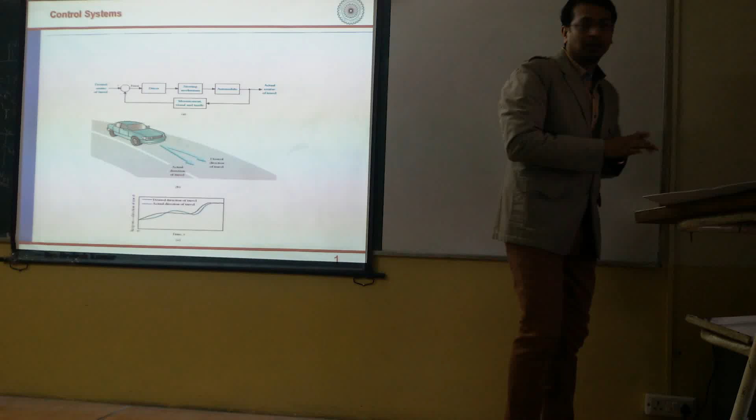Let us start our subject of control system with some basic definitions. The first definition is the definition of the system itself. System is nothing but domain of interest. Suppose you are interested in this classroom; it will become a system for you, and what is happening outside the classroom, you are not going to pay any heed to it.

Similarly, you may be interested in a particular component or a particular part of an industry. Then that particular part will become the system for you, and the other part of the industry in which you are not interested will become out of system for you. You may be interested in the whole industry, which means there is no particular size for a system. It depends upon your interest and your focus.

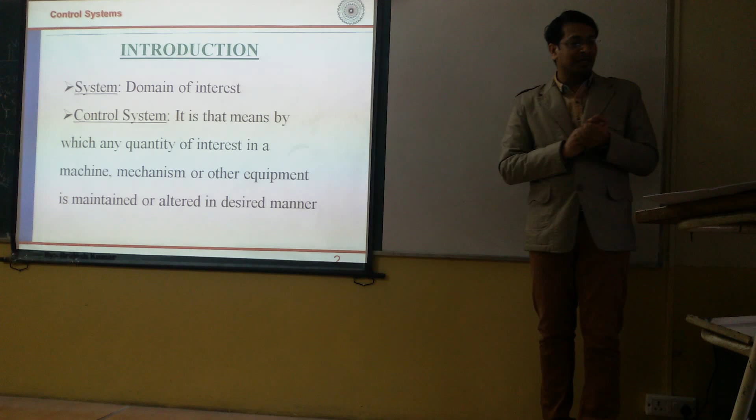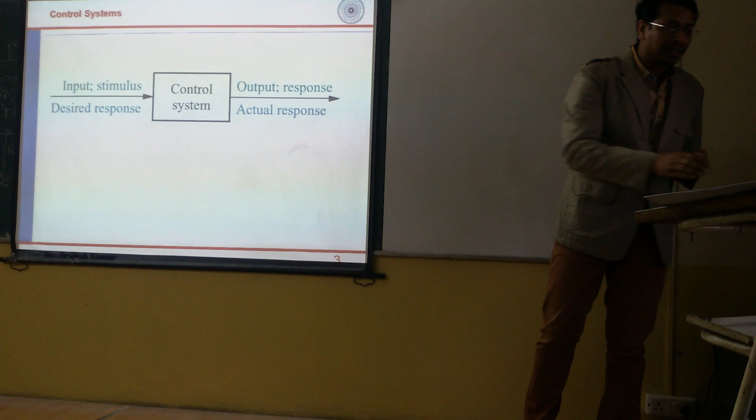Similarly, coming to the control system, the definition of the control system is that means by which any quantity of interest in a machine, mechanism or other equipment is maintained or altered in a desired manner. What I mean to say is that if you consider a control system as a black box, then at one end of the black box there will be input or a stimulus or desired response or set point, meaning what you want from the system.

It will be the input to the system, and the output will be just output, or response, or response variable, or the actual response. So set point and actual response. The difference between set point and actual response, you know, that is the error.

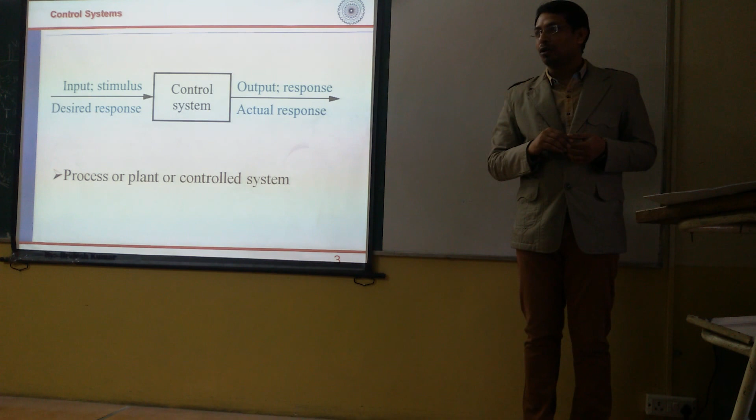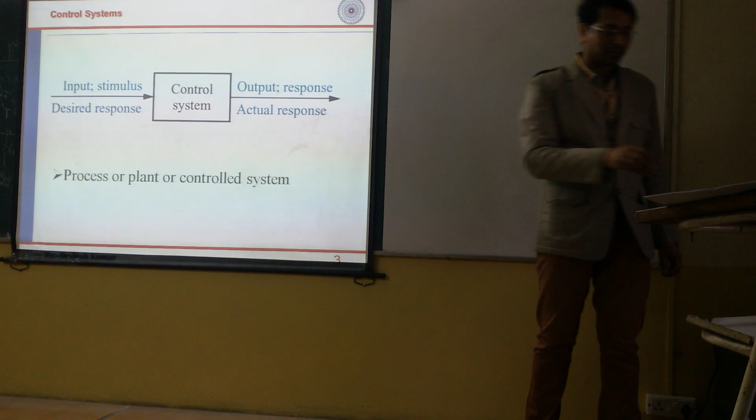The system to be controlled is given different names like process, plant or controlled system. You can say anything, depending upon the application. When you read process control, you will use the word process, and in this particular subject you will use controlled system. You can say plant also.

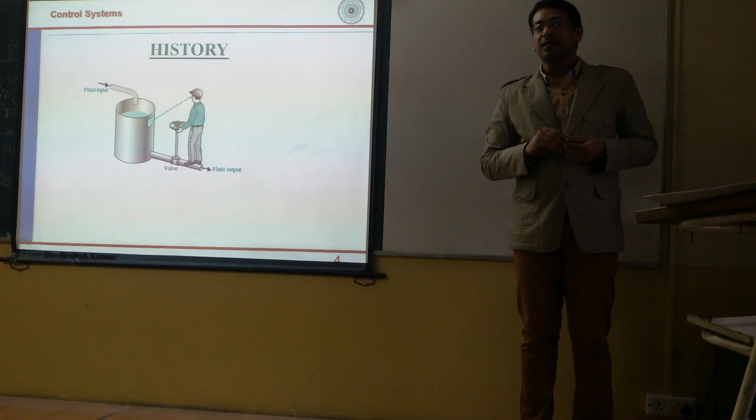So now coming to the history of the control system: the application of control technology, historically speaking, started in the era of process control, typically from 1900 to 1940. You can see a picture in which manual control is used. An operator is trying to maintain the position of the valve by seeing the level inside the tank. Here the eyes of the operator act as feedback, meaning he sees the level of the tank and accordingly closes or opens the valve.

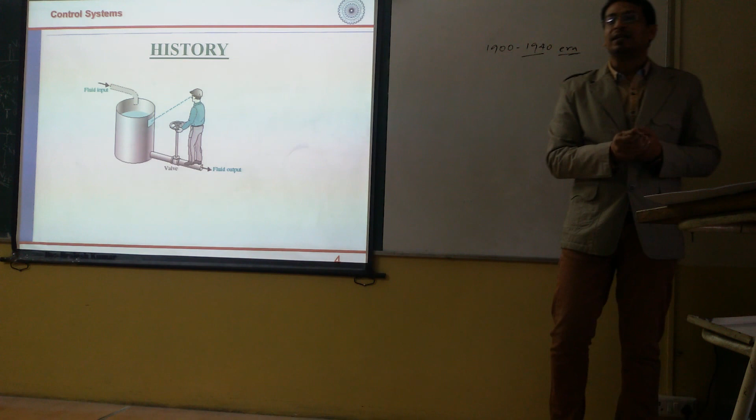And his brain acts as a controller, and the actuator, that is the final control element in a control system, is his hand. He is using his hand to open or close the valve. His final action is taken by his hand; that's why it is known as the actuator. So note it down that actuators are the final control element in a control system.

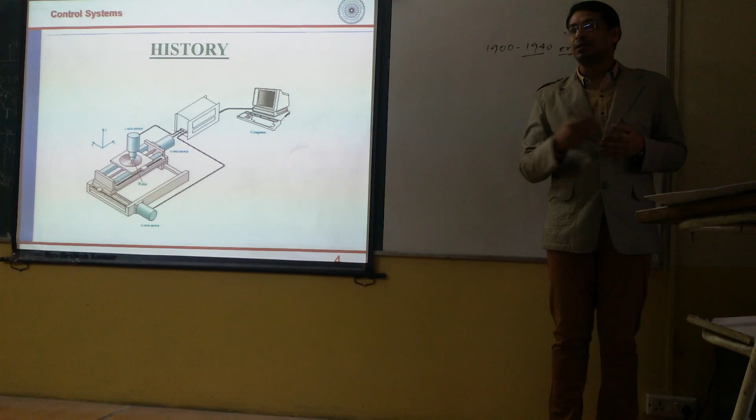From that era of process control, nowadays our industries look more like this. We have traveled a lot and moved from manual control systems towards automated control systems. How did it happen? After the era of process control, during the Second World War, the need for automatic gun positioning, automatic aircraft pilot, and automatic radar antenna control developed. To solve this problem, the theory of servo mechanism was developed during the Second World War.

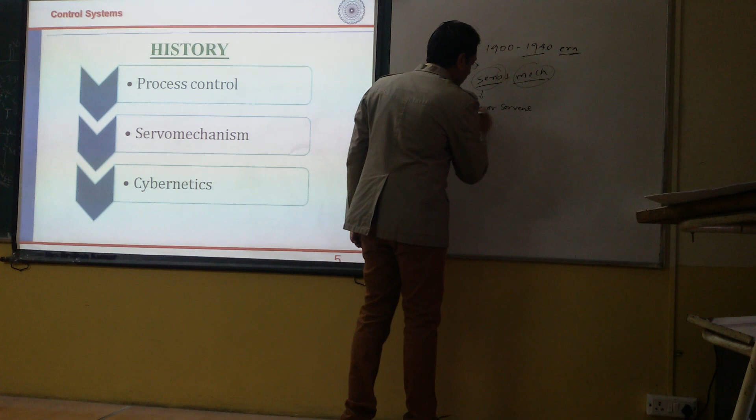If you break down the word servo mechanism etymologically, it consists of two words, servo plus mechanism. The word servo means slave or servant. It means servo systems are those systems which are slave or servant to their command: if you give a command, they will try to follow it. That's why in laboratory experiments we have seen servo potentiometers and servo motors. That's the meaning of servo, slave or servant.

After the servo mechanism, the theory of control system also started to be applied in socio-economic and biological applications. These applications come under cybernetics.

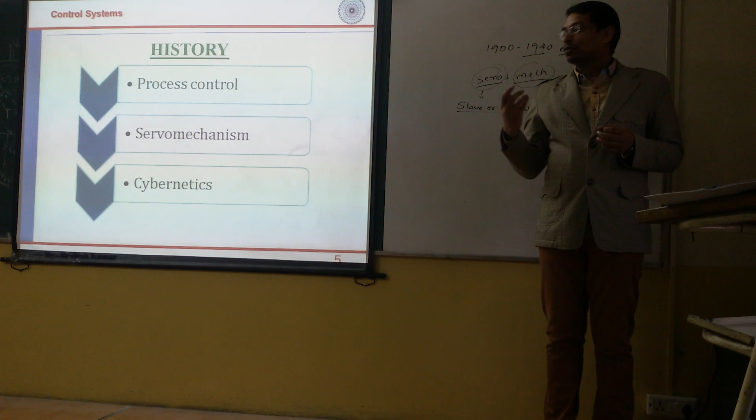So with the passage of time, the theory of process control, the theory of servo mechanism, and the theory of cybernetics started to merge, and a unified feedback control theory was developed. Whatever you are going to read in this course is nothing but unified feedback control theory, and this unified feedback control theory will be applicable to all the sub-branches of the control system.

Whether it may be process control or servo mechanism or cybernetics. So in this particular course you will read unified control theory, and accordingly you may specifically read process control in your third year, and you will see some part of servo mechanism here also, and cybernetics we are not going to pay any heed to. Okay.

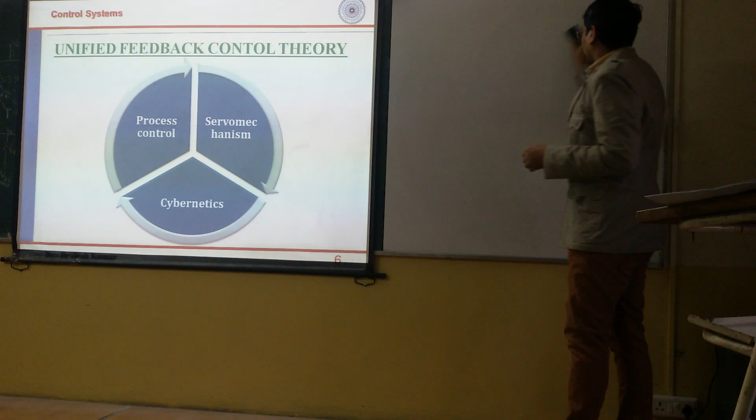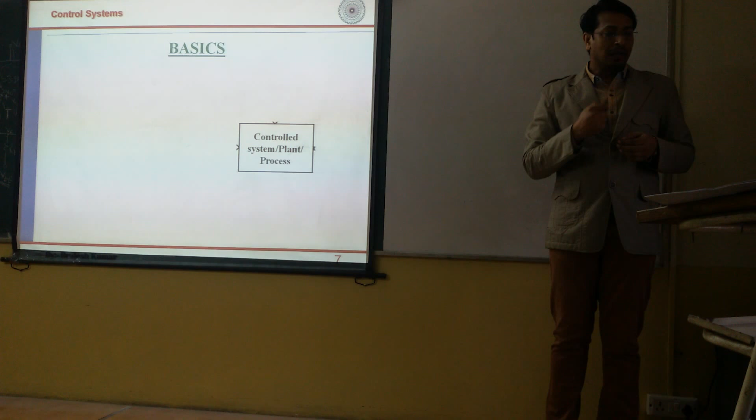Now, in the beginning of the discussion, we will start with a block. I have just said that you can call it a controlled system or plant or process. So this is a controlled system, or you can say plant, or you can say process. The output of this block is your response variable RV or control variable. These are the attributes of the plant or process which you want to control.

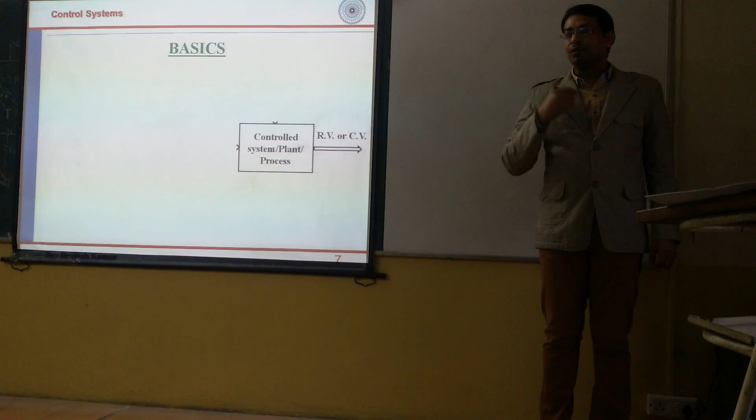Suppose you take this particular classroom as a process or plant; you may be interested in one of the attributes, say temperature. Then temperature will be the response variable or the control variable which you want to control. And this control will be exercised with the help of the manipulated variable.

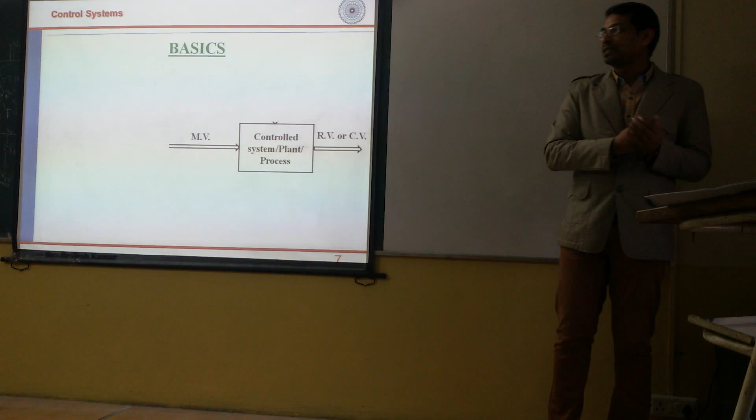This control has to be exercised in the presence of disturbance also, because you cannot avoid the presence of disturbance. These are unavoidable and undesirable inputs to the plant. The disturbance may originate from outside the system, from the outer environment, or from the system itself. Though it has been depicted in the picture as coming from outside, please note that the disturbance may

come from inside also. For example, if you have designed your plant for a particular operation and there are certain components in it, due to passage of time some values of components may change and act as a disturbance. This is one example. There are also cases in which different disturbances come from inside.

This manipulated variable is going to react to the plant or process, and this reaction will force your response variable to follow your command. So this manipulated variable will be guided by a controller which you as a control engineer are going to design. So what will be your job? Your job as a control engineer is to analyze and design this controller.

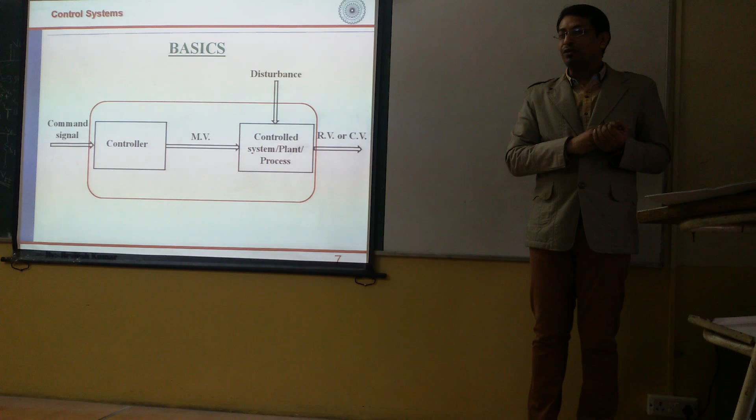And the user, those who will use the finished product, will just give a command signal. So for our course, our system is this: controller plus controlled system. So we as control engineers will read the theories of controllers, the various types of controllers, the various methods to analyze them, and the various methods to design them. And the user will just give the command signal.

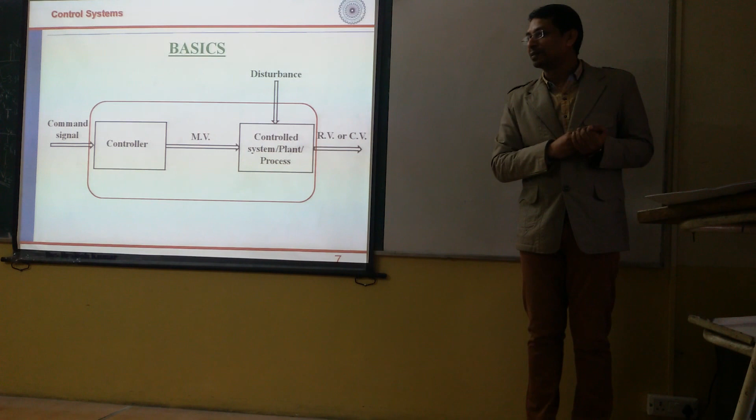Disturbance will come from the environment or from within the system itself, and he or she will desire the control output to be almost equal to the command signal. If there is a large difference between your control variable and the command signal or set point, your product will be out of the market. Okay.

So there are various techniques to achieve this particular control. One of these is that you have a controller and a command signal, and the user gives the command signal to the controller, and the controller manipulates this command signal. The controller analyzes your command signal. Maybe you just press a button, but the controller, after analyzing it, will generate a signal. That signal is known as the manipulated variable.

Then the manipulated variable will react with the controlled system and generate a response variable in spite of the presence of disturbance. So this is a system, one of the schemes with which you can achieve that control variable. But the problem with that scheme is this: suppose you have designed an intelligent controller, keeping the demand in mind.

For example, this classroom is your process or plant. So you know what the temperature variation of this classroom may be, say from 3 degrees up to 44 degrees.

So you are intelligent enough to analyze the need of the, you can say, plant. And you also know what may be the possible disturbances. Say somebody may open the window or somebody may open the door. So you are intelligent enough to know what may occur. But you can't predict exactly the nature of disturbance. But up to some extent, you have an idea of what may occur.

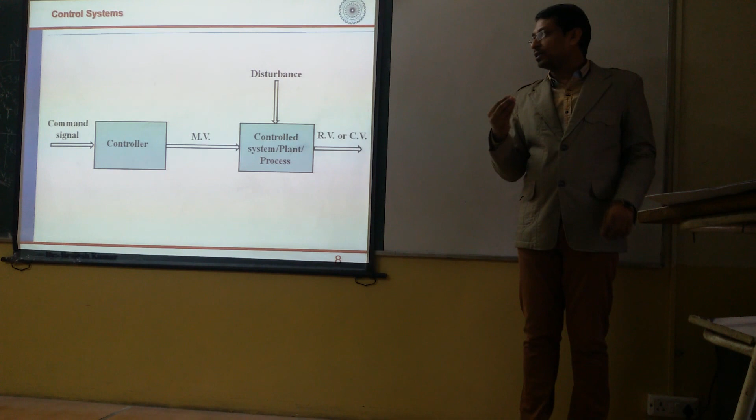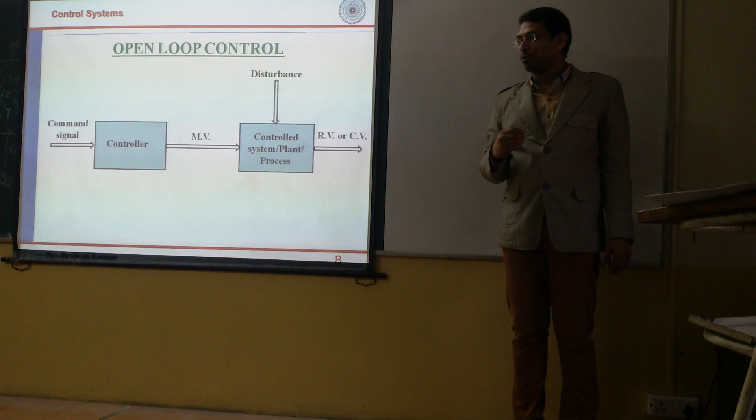Such terminology is also used, but we will focus in our course mainly on feedback control, because it is good to have feedback so that we can handle the change in disturbance also. So this type of system, which is also used for simple systems, is known as an open loop control system. So a question may be asked: what are open loop control systems, or give the differences between open loop and closed loop control systems.

So what may be the advantages of this? It is simple. You have seen that there is no feedback, so just simple connections are there. So this is one of the advantages. It is simple. Second one, it is stable. How it is stable and how the feedback control system may become unstable, we will see in the later section. Of course, there are fewer components, so it is economical also, and it is easy to construct. Because there is no feedback, you need not have a sensor.

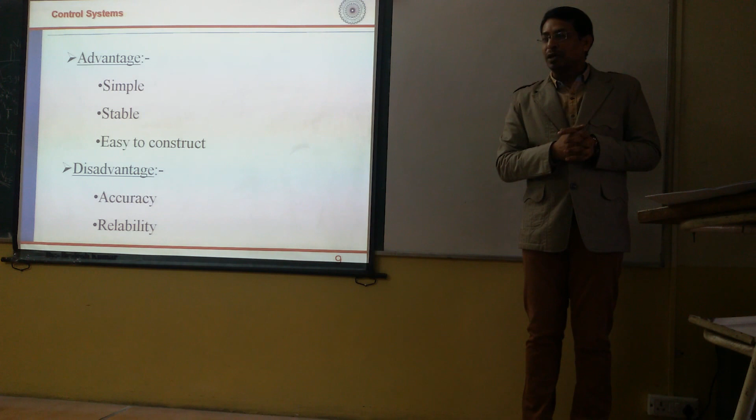What can be the disadvantage? The disadvantage is accuracy itself. Why? Because you do not have any feedback, so you will not be able to know what the error is. Because error is the difference between the response variable and your set point. So you will not be able to; you will just analyze. Okay. Second one is reliability.

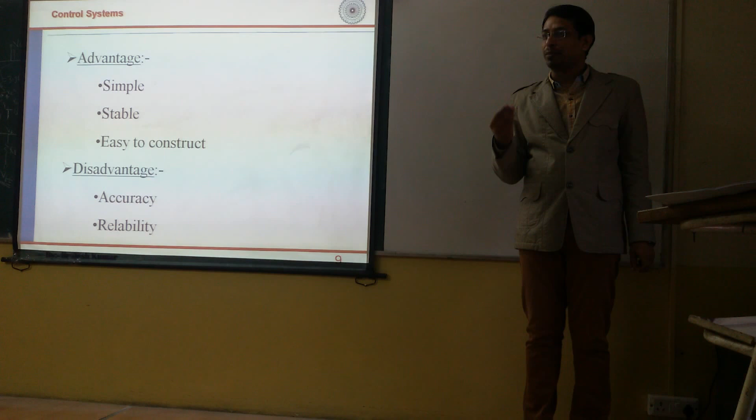Means, okay, you have designed an open loop control system. You can't be sure whether after some time it will remain reliable or not. Means it may give some undesired output, and you do not have any feedback mechanism to check it. Okay.

Can you provide some example of an open loop control system in daily life? Have you seen? So, washing machine. Well, first is of course the automatic washing machine. Many of you may think that a fully automatic washing machine should be, or has to be, a feedback control system. But I am saying that the automatic washing machine is an open loop control system. Can you say why? And how?

You might have seen an automatic washing machine. You put your clothes there, add some detergent, close the lid and forget it after setting the program. So if you have closed the lid and forgotten it, you are not going to do anything. So how is it open loop control? Sir, actually, we cannot control the extent to which the dirt can be removed.

Exactly. Here, what is the response variable, or what is the control variable? If you take your washing machine as a system, what is the desired output of the washing machine? It is not the drum speed, it is not the level of water in it, or the temperature of the water going inside. It is the cleanliness of the clothes you have put inside the washing machine; that is the desired output, and it has no mechanism to give you feedback on the level of cleanliness and act according to that.

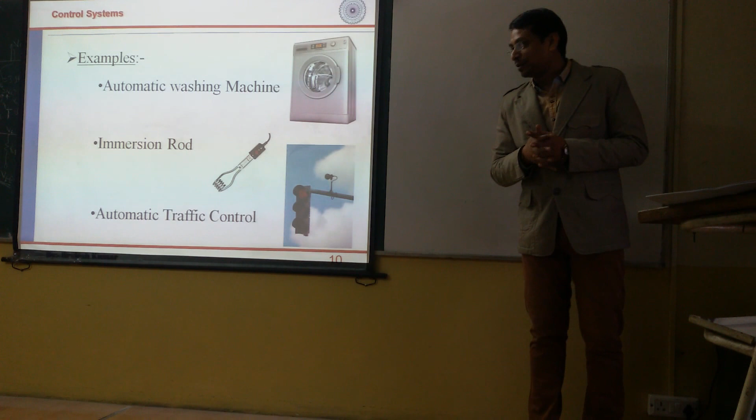Means at night, okay, everybody jumps the signal. So these are some examples of open loop control systems. What is next? You have seen that these are simple. That's why nowadays we also use these systems. But in those examples, our requirement was not so hard.

If you have dipped your immersion rod for more than the required time, instead of 60 degrees centigrade it will get 70 degrees centigrade. It is not going to change anything. You will add some cold water. So the requirement is not so hard, and where the requirement is not so hard, you can use an open loop control system. And you are very familiar with the automatic washing machine.

But in industry, the requirements are hard. Any change in your response variable may lead to accidents, or your plant or system will not work properly. So we switched from open loop control system to closed loop control system, which we will study in our next class. In a closed loop control system, you might have a feedback from where? Output to controller, you can say.

When you get a feedback from the output, you will be able to check the effect of disturbances. Because the manipulated variable reacts to your plant, and in a similar way the disturbance also reacts to the plant. Your plant will give the output according to the disturbance and manipulated variable. So the output will also be affected by disturbance, and that can be measured in the feedback, and your controller can check the differences, or you may have a comparator.